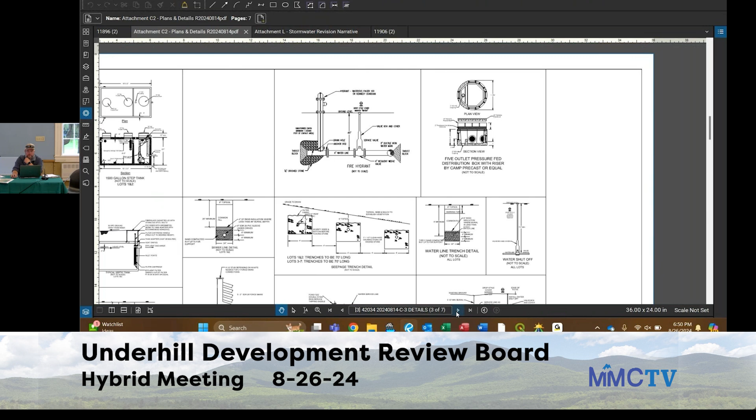And that was the biggest change. We had another sheet here - the stormwater consultant had requested confirmation of the 702 contour elevation because we had discussed that the open space wetland meadow is a low point. So we added spot elevations to the plan from our on-site topographic mapping to show that 702 contour we're showing was correct. We've got a low point here at about 701.4, 701.5, and then we start to work our way back uphill as we move to the south, until we get to the 702 contour just by the property line.

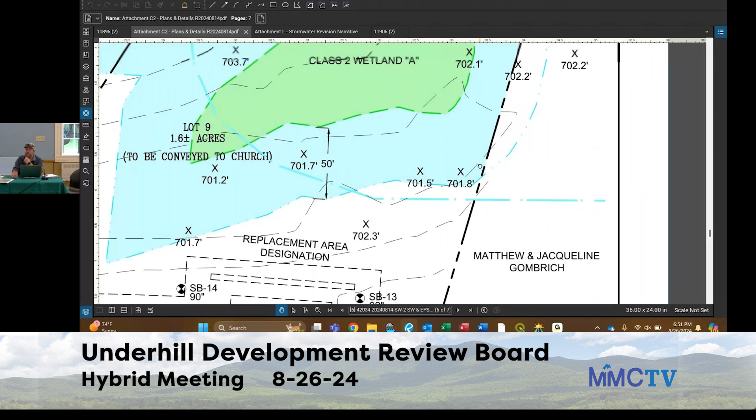And then I think there were a couple other miscellaneous comments on some other infrastructure that was not stormwater related.

Could you go back to the south side of that field there, where it looks like that 702 contour comes together? Right there where your cursor is - where's the water going from there? This is a low point, so this is a collection area.

So is it ever getting in that ditch? On the uphill side, no. So where's it going? That's the low point - where's it go from there?

I don't think there's anywhere for it to go. I mean, on a larger storm it may, but when the ground is frozen and covered with snow and we get that rainfall, we've got a lot of precipitation, I'll call it. Water, stormwater runoff, snowmelt runoff collects in this pond, in this field, to the point where people have submitted pictures of it - it looks like a pond.

So right now, you're saying everything's going to get directed into the ground and nothing's leaving the site? Correct. That's why those photos exist, because this is the low point creating a ponding area. So we're trying to manage that as well by elevating the houses to the north. There's the stormwater swale up above, but we're not conveying any stormwater runoff into that swale.

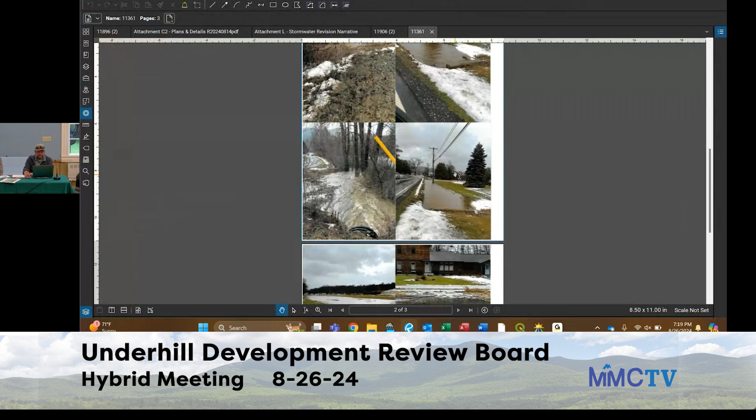George, is it not possible, since the state does not regulate class 3 wetlands, to make a class 3 wetland into a class 2 wetland? Is that something that one doesn't do, or?

It would depend on the amount of disturbance being proposed and if the town regulations would allow for it. At the state level, it's correct, they do not regulate class 3 wetlands. At the federal level, for the Army Corps of Engineers, they don't have wetland classes, a wetland is a wetland. I believe there's a certain limitation on area, around 5,000 square feet for disturbance to those areas, before it gets uneconomical, because you've got to pay a mitigation fee of about $180,000 an acre. So even 1,000 square feet gets pretty expensive.

So depending on the size and scale of what we were proposing and what the town regs would allow for, there may be a way to do that. But my reading of the regulations was we had to respect those wetlands and the buffers, so we made sure to keep all earthwork or any kind of disturbance out of those buffers and wetland zones.

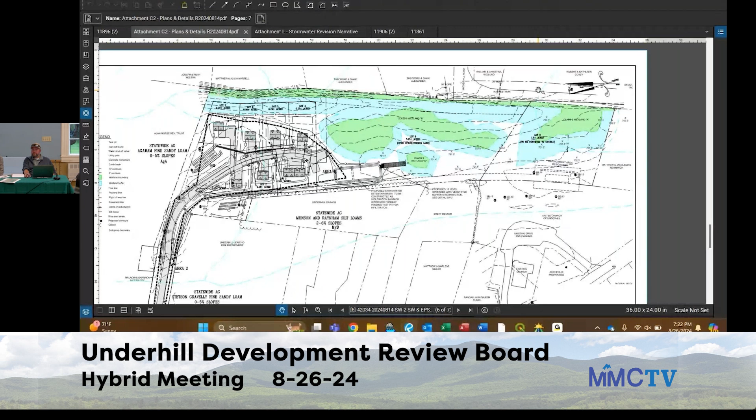Could you pan over to get the main subdivision to the middle of the map? Sorry, you zoomed in, so my screen isn't the same. Is that right there? Maybe zoom out just one hair more. Okay, can you hold on to that and then go over to the photos we were just looking at a minute ago. Yeah, right there, and I want to pan that down a little bit. Just bring this one down. Sorry, yeah, right there, I'm just going to zoom in. And then I can control it, I guess. Does that look right?

So we talk about stormwater, but then there's also flood inundation. So this water, and Meadow Lane folks could correct me if I'm wrong, most likely came from the Roaring Brook, or some inundation from the Roaring Brook. There's just a spot on the Roaring Brook near a property we're trying to do a FEMA buyout on, where it's just a subtle little swale. And when the water starts to lap up on that bank and releases out of that swale, it just comes flowing in here.

And it has for years. People say, oh, the Barrett Lane culvert was a major cause of that, but I have clear proof in 1940s photographs of this area flooding before. So I'm not blaming it on the Barrett Lane culvert, I'm just saying it's always happened. And if you even look back in the deeds, when the Dumas property was a school, there's talk about flooding in those days, back in the 19th century.

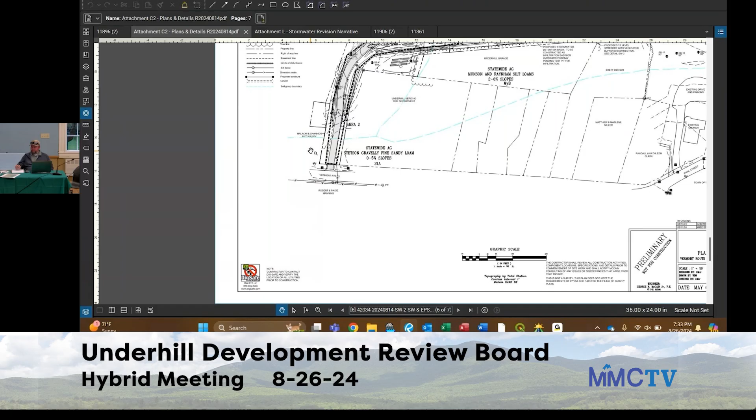So yeah, it'd be great if we could get rid of all the stormwater through Route 15 drainage, but I can tell you I've been in each one of these catch basins and the pipe is very small and it heads south all the way down past the old foam building, and then it crosses down there. So this storm system isn't capable of handling any kind of stormwater except for what's coming off the sidewalk and Route 15.

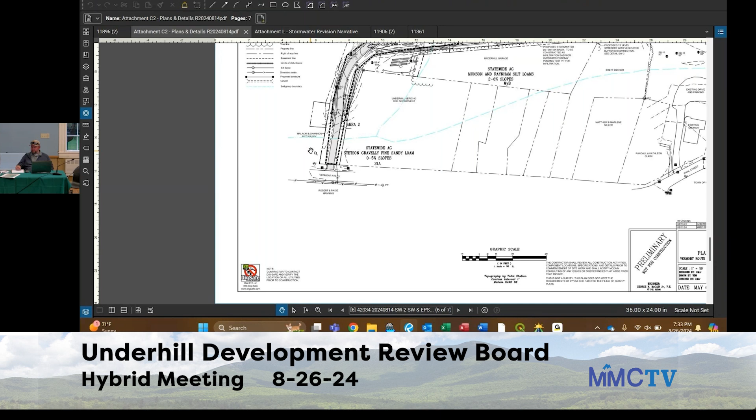So can you go back to the photos for me, one of you guys? Looking at the house, the brown house photo -- can I interpret this correctly? Is that water in Harvest Run, or is that dirt, or are these your photos?

Is this your photo? Come up. Are these your photos? Yes, they're my photos. So, are you Alan? Alan. Okay.

Is that water coming out of the ditch into the field? Yes, the ditch which drains Upper Meadow Lane, Sugar Hill, is what we're looking at there. And when water comes down to the post office, it's so flat it has nowhere to go, so it overtops the ditch, floods those people's basements right there next to the post office, and runs into the field, which we see on the left-hand side.

So if the retention pond, in my view, is designed to retain the water from Lower Meadow Lane, that's well and good, but this water is going to inundate that retention pond, because you can see in the picture that it's already more than what the retention pond probably will be. And it's all because the water has no place to go, so it has to back up somewhere.

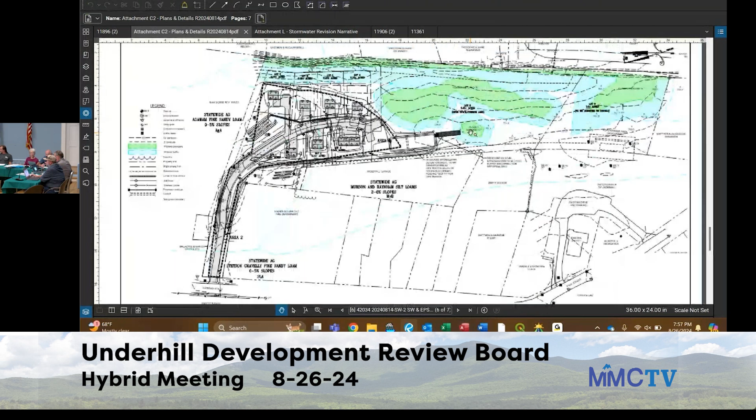So comparing your pre-development analysis with your post-development analysis, where is the study point? The study point is the outlet of the proposed detention structure. Right there? Right here.

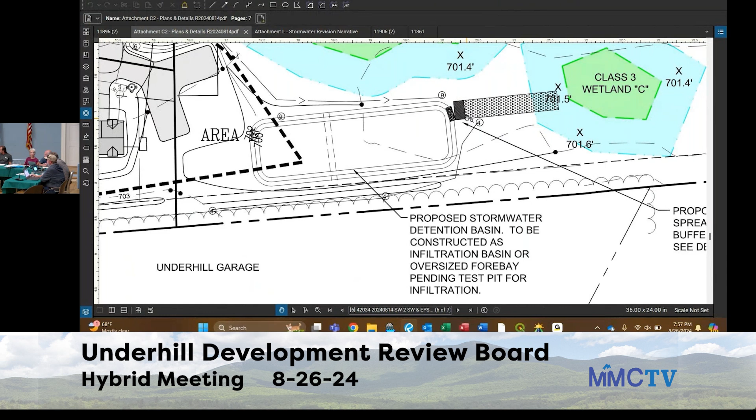And so in your pre-development analysis, you have 2.68 CFS going through the property somewhere. Where does it go? The same point. So this dark hatched line is our subcatchment, so that's at this point right here. But where does it go? Pre-development, where does it go? You came up with a number of 2.68. The Class 3 wetland area.

Yeah, 2.68 cubic feet per second is going into the Class 3 wetland. That's our receiving water, the wetland. Which is smaller than your detention basin right now, right? If I'm correct, looking at it.

And so what you're saying is it goes in there and it doesn't go anywhere else? No, it goes in there, it continues at this 702 contour we're showing through here. This is our wetland meadow, so it remains in this low point in the middle of the property.

During those storm events, all right, and then post-development you've got 0.16 CFS coming out of the detention basin. And that's, you're maintaining, you're testifying it goes to the same place. That's what our intent is. So your intent is what, or that's what your design says. That's where it goes. Okay.

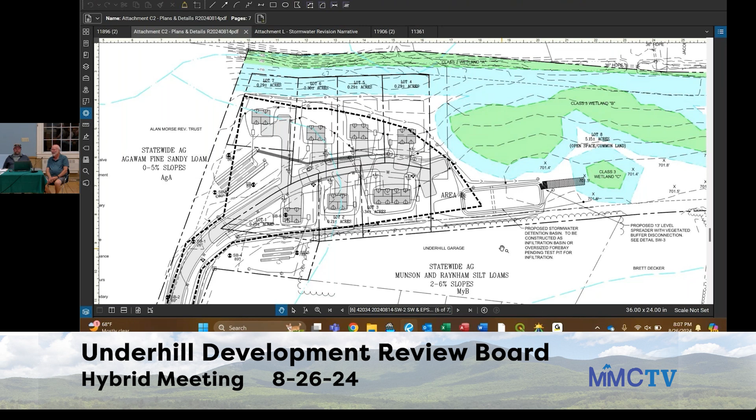The zoning and the septic systems and the infrastructure that's going to be required, we want to get as many houses on here as we can. We think this design was a decent starting point effort to use the best piece of this property, the least likely to flood, the highest ground property, to get the most units in that could be built. And I think that was sort of our starting point on this.

So could we lose houses? Sure, we could lose houses. Does that make the project less effective? Yeah, I think it makes the project less effective. This is not an inexpensive operation. We've written tons of grants, we've raised a fair amount of money. Many people in the community have given money to this effort. And I think every time we take a unit out, that comes at a huge cost in terms of the ultimate goal of providing affordable housing in this community and meeting the need.

So I can't say yes, I can't say no. Obviously, if we're a church, we don't want to build houses that are going to flood. That would be silly from our church's perspective. We want this thing to work. And secondly, we want to be good neighbors. We don't want water from this site to become a problem for adjacent property owners. That doesn't meet our criteria either.

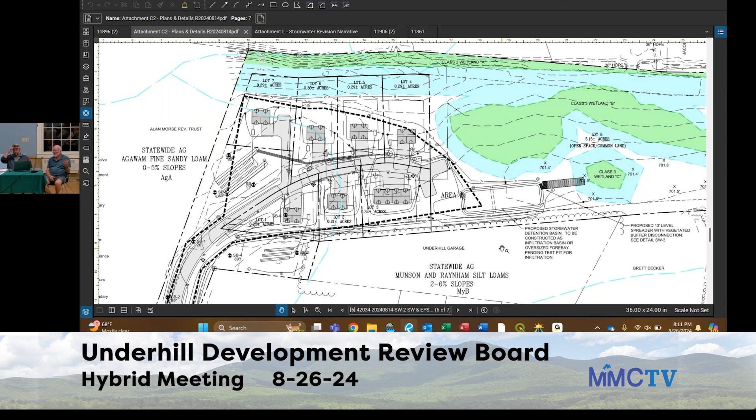Similar thing from Meadow Lane - the property out of Roaring Brook and Lower Meadow Lane kind of meanders along the backside and ultimately ends up in this property. So the question is, as much as how can we make this work, how many houses can we get into this, how can we be good neighbors, not cause a problem to surrounding property owners, but also how much water are we supposed to be responsible for coming in from other areas? Long way to answer your question there, sorry.

Well, that's a good overview, Dan. Yeah, thank you. I mean, I think we're seeing water come from Roaring Brook, as you said, through that property. So there's that water, and then the water off Harvest Lane spilling over into this property. Theoretically, maybe the stormwater plan takes care of what's falling and landing on this property, but I don't know how we take care of other properties all around it. And the further challenge, I think, I presume it's a challenge of taking care of that when the ground is frozen.

You can leave that on.

I think I know the answer to this question, but does the board feel they have enough information at this time to make a decision? Would you like to discuss this information, this application, in open or closed session?

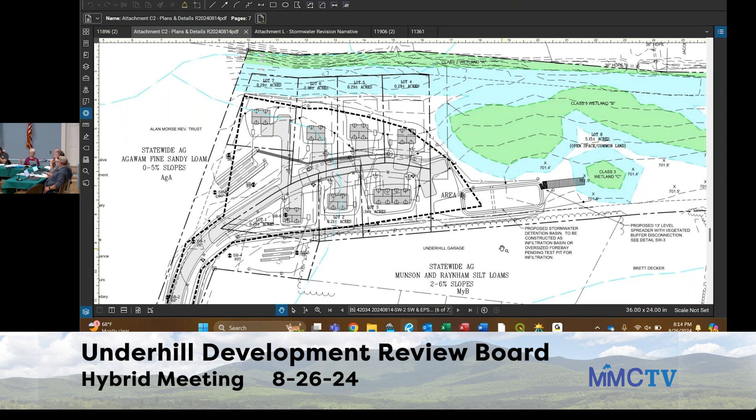I don't feel I have enough information to make this decision right now, but I'm not exactly certain who I would suggest we tap into. One thing is I would like to see what CEA has to say about the redesign because I don't know anything about civil engineering. And then I think the issues brought up about water coming onto the site are very real. I don't know if that's something George feels is within his skill set or purview to deal with, or if that might be someone - say, a floodplain person - who could advise us on this issue of water coming onto the site, which is so much more vague, I would think, than designing a stormwater system for the development on the site.

So I don't know how that would even get assessed. But I feel like I need more understanding of that. I'm sorry to hold up progress, but I need more information somehow, or I need it to make more sense to me. So what I think I'm hearing is you'd like to see CEA's review of George's response. I would like, at the very least, that. Yes.

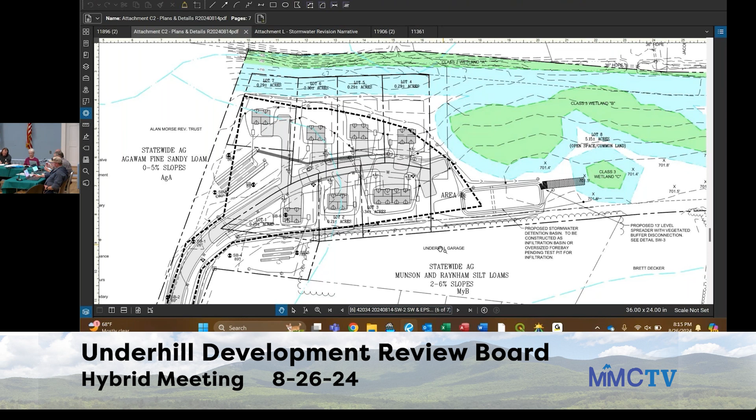Our next hearing would be the 16th of September, I think. The first Monday is Labor Day, obviously, and the third is the 16th. So given the Labor Day week, two weeks away, some people take time off.

Well, you've talked to Michael Koch, the staff engineer from CEA. How much time does he need to give us a review of George's response? You think you can get some out of him? I think the 23rd might be a safer bet, which is the following Monday. So we'd do a special meeting on the 23rd, just buys a little bit more time.

You guys okay with continuing the hearing to the 23rd? Are you going to be around? On the 23rd, yeah. You're committed. We're all committed now to the 23rd. I'm back on the 13th or 14th, so it should be fine. If you're not going to be around, we've got to figure out when to continue the hearing. Yeah, I'll be around. Okay, so what I'd like to do is, I need a motion.

Do you have a question? Yeah, I guess I'm kind of curious on maybe more than what Penny is curious about getting information on. I think it would be nice to understand what the 100-year flood analysis does to this property and what's underwater at that flow.